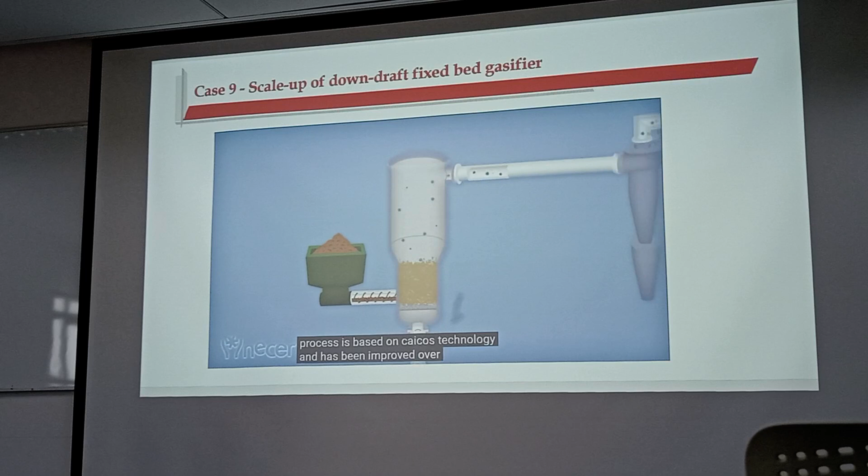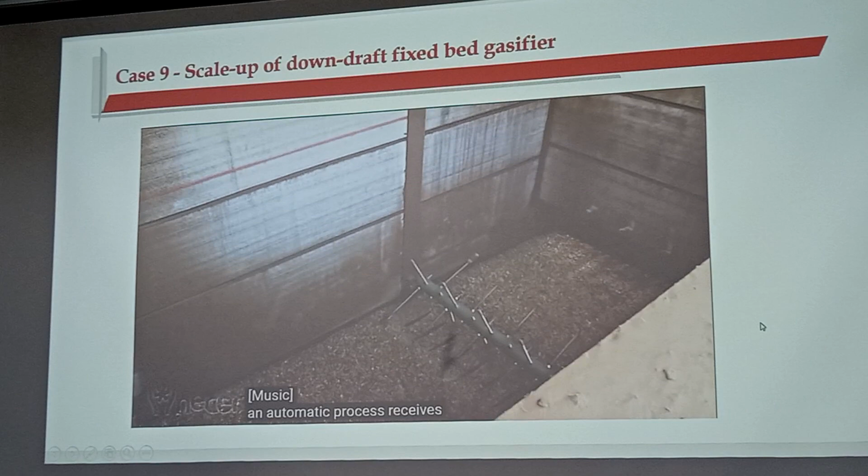The process begins after receiving the biomass and converting it to homogeneous fuel. An automated process receives the biomass and dries it in a patented deep bed drying system. Once prepared in size and moisture, the biomass is transported and fed into the gasification system, which is the heart of the plant.

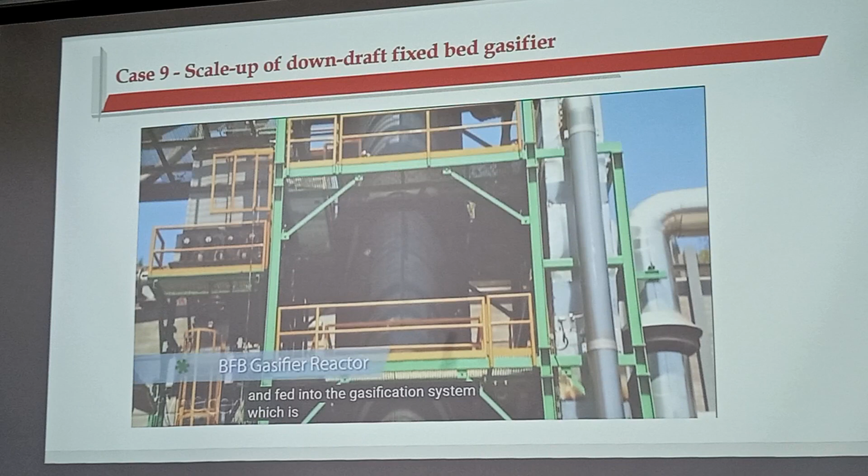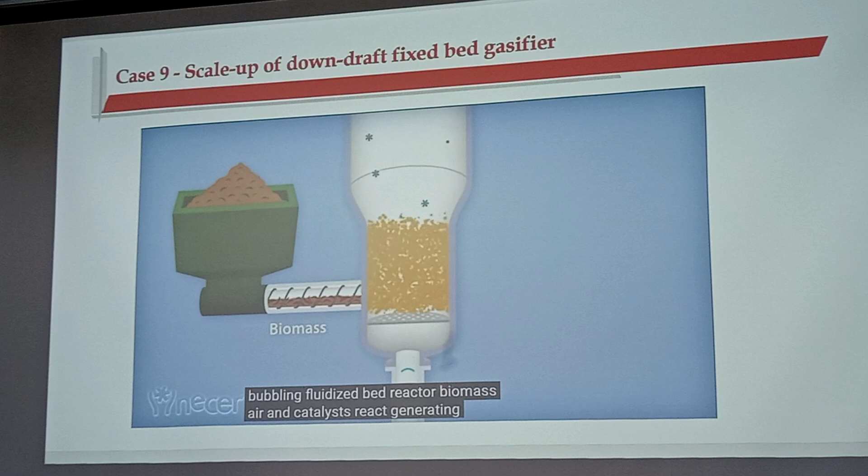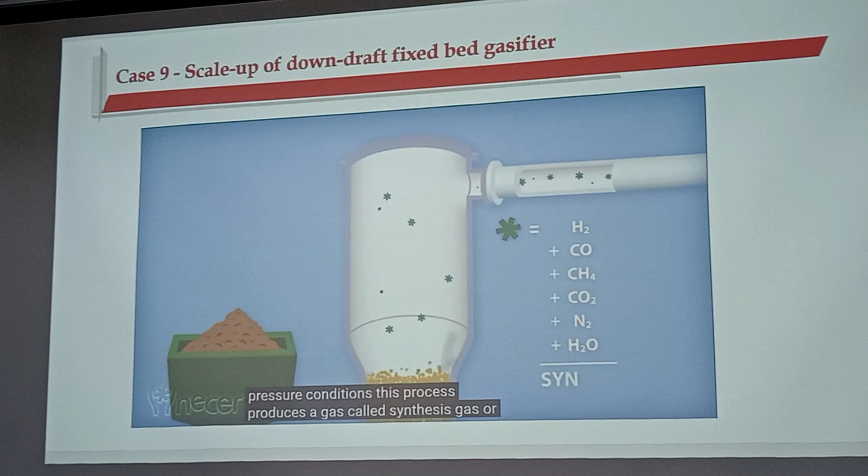In the bubbling fluidized bed reactor, biomass, air and catalysts react, generating more than 40 major thermochemical reactions with a homogenized reducing environment and controlled temperature and pressure conditions. This process produces a gas called synthesis gas, or syngas. The syngas exits the reactor at 800 degrees Celsius and must be conditioned before being used in combustion engines.

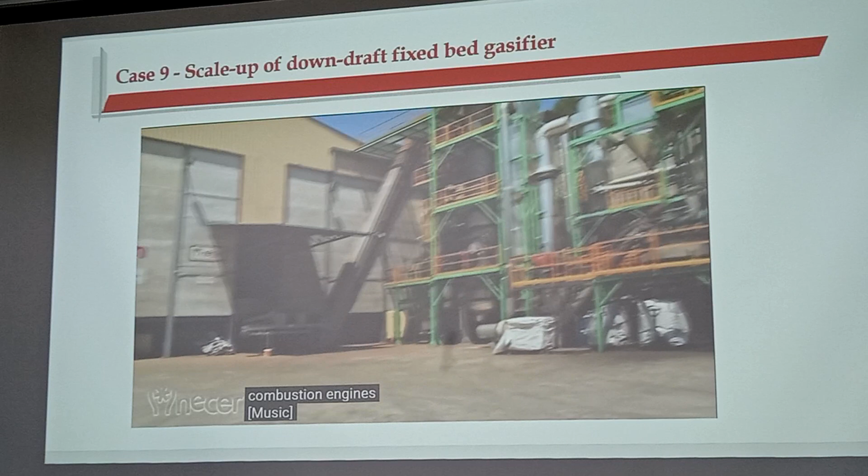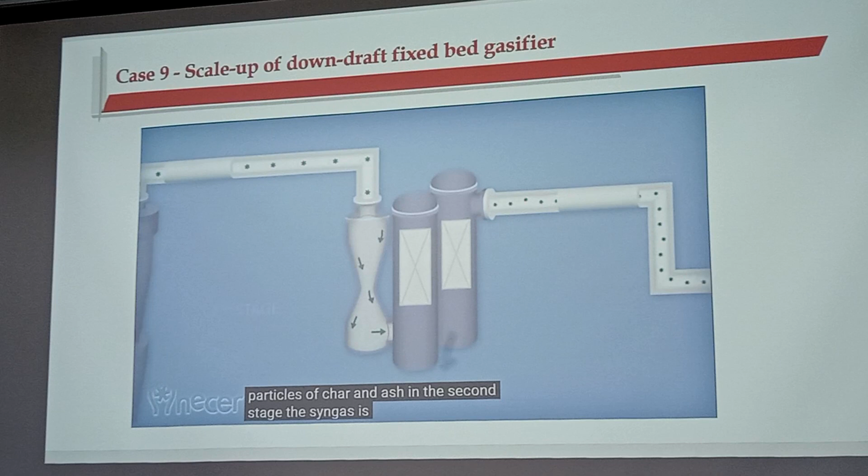The syngas conditioning system consists of two fundamental stages. The first stage consists of high-efficiency cyclones, which separate the solid particles of char and ash. In the second stage, the syngas is subsequently cooled and cleaned, ensuring optimum conditions for energy use in cogeneration systems.

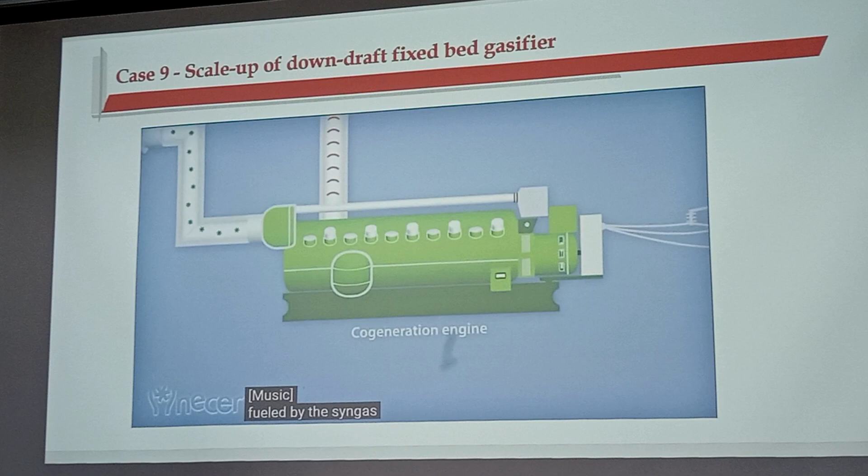Fueled by the syngas, the cogeneration module is a generator that produces energy, which is fed into the grid. Moreover, these internal combustion engines produce useful heat at two temperature levels, thus increasing the added value of available heat.

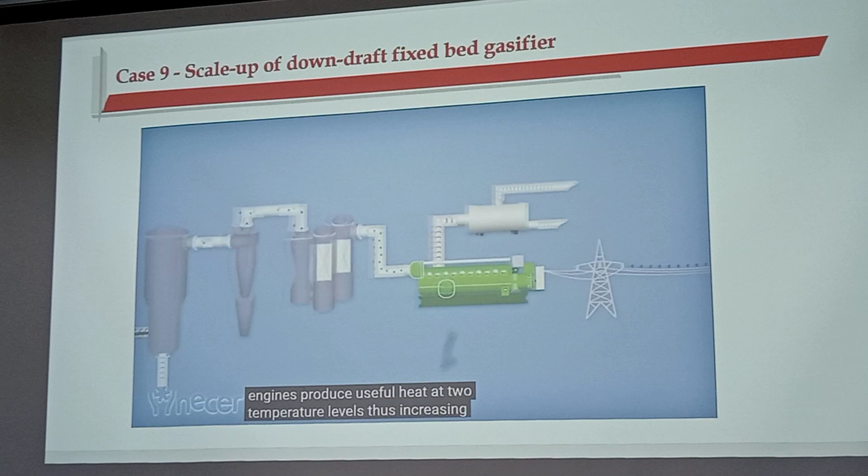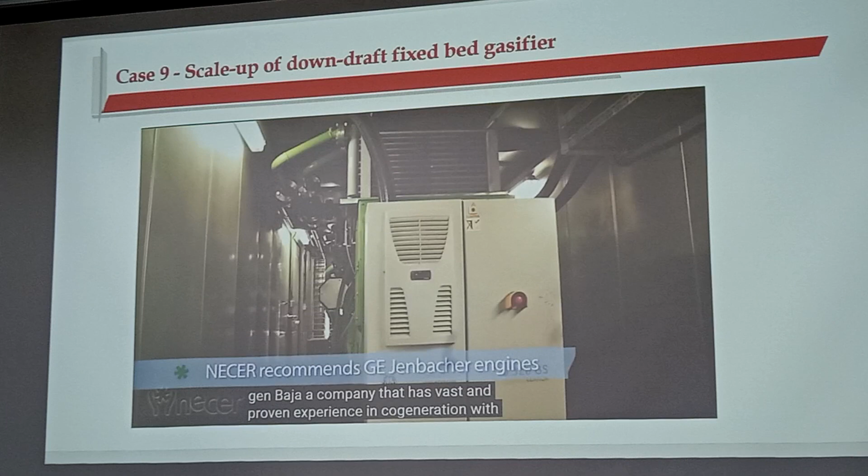The cogeneration modules are developed by GE Jenbacher, a company that has vast and proven experience in cogeneration with special gases such as syngas, with references of more than 40 megawatts in gasification applications.

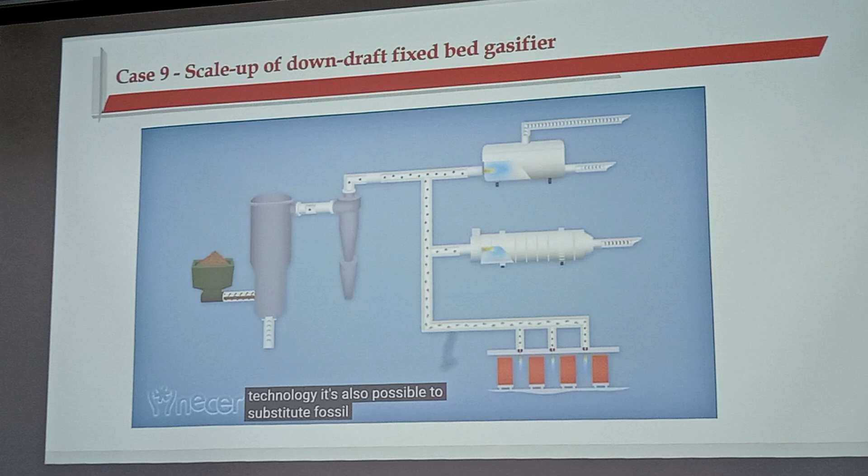With this technology it is also possible to substitute fossil fuels for renewable energy in direct thermal applications. Syngas is burnt directly in thermal units such as gas boilers, dryers and ceramic kilns.

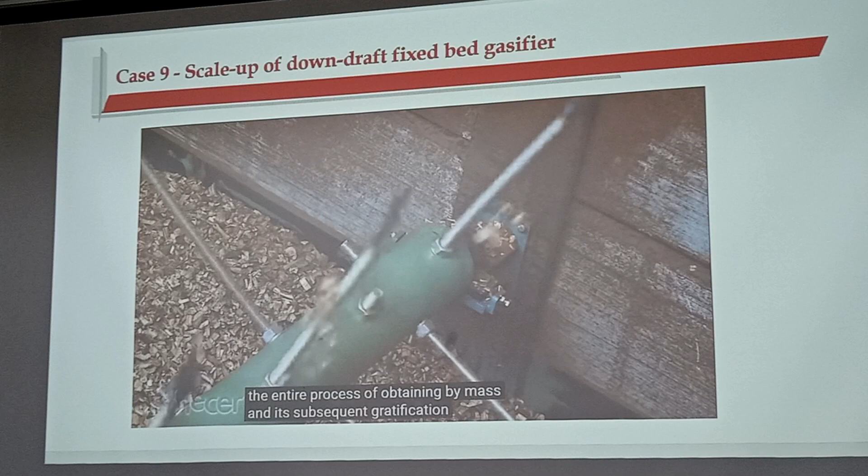The entire process of obtaining biomass and its subsequent gasification has a minimal environmental impact, meeting all the EU's current regulations. It's a clean, ecological and sustainable process.

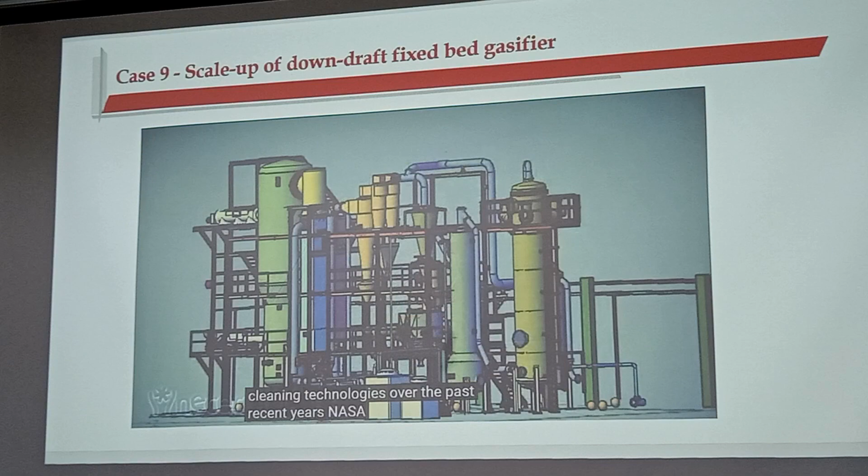Companies have strived to update and improve both the gasification and gas cleaning technologies over the past recent years, specializing in the design, manufacture, installation and commissioning of power plants in the 1 to 6 megawatt range using GE Jenbacher engines.

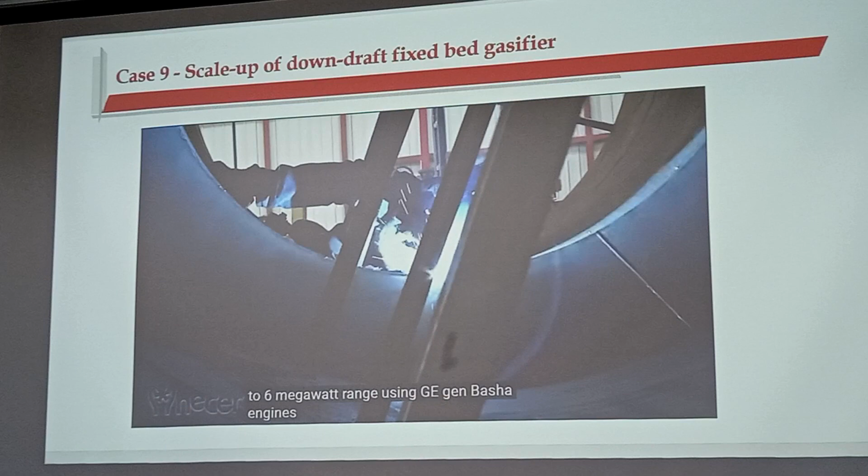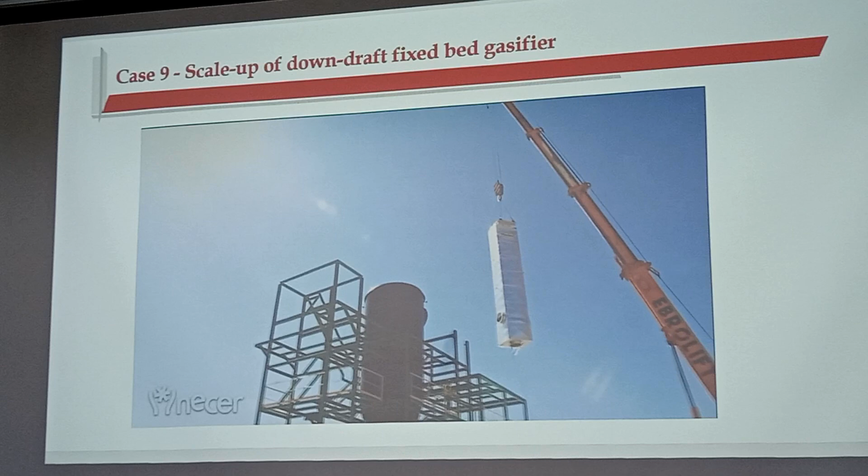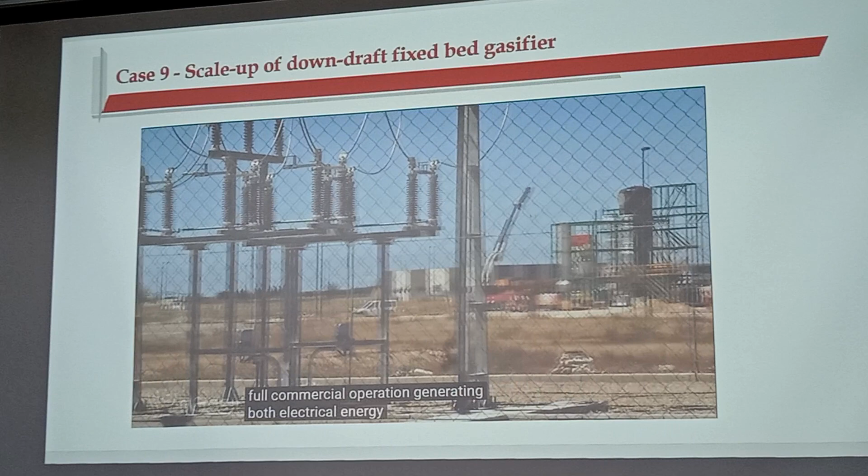This represents the most advanced gasification technology in Europe in full commercial operation, generating both electrical energy and fossil fuel substitution in thermal processes, and thus achieving sustainable green energy production.

This is the end of this video. After watching these two videos, we know the large scale systems.

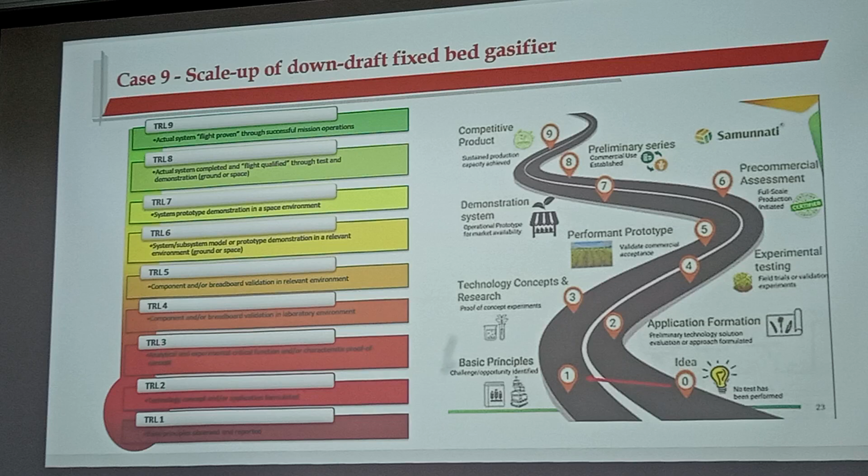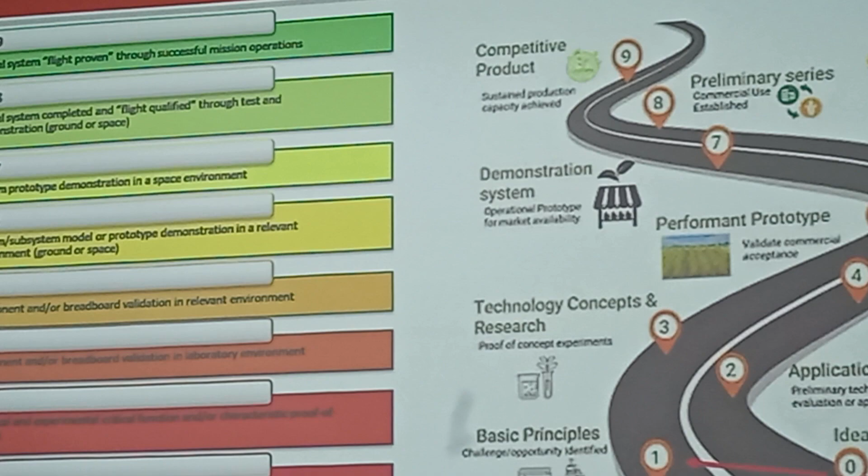You may ask the question, how to develop new technology to create a new system? It's very important. Actually, for the development, for the scale up of different technologies and systems, usually it's not easy. At the beginning, it is an idea. All the new ideas actually are generated from the university and the research institute. Of course, some new ideas are also generated from the research department in some companies. So the first important thing is that before you develop a technology, you should have a new idea.

We also call it innovation. Innovation is one of the most important parts in the development of different technologies. How to understand innovation?

Anybody can give us your understanding on how to understand innovation, from your opinion. What's innovation? Do you have any ideas? Innovation.

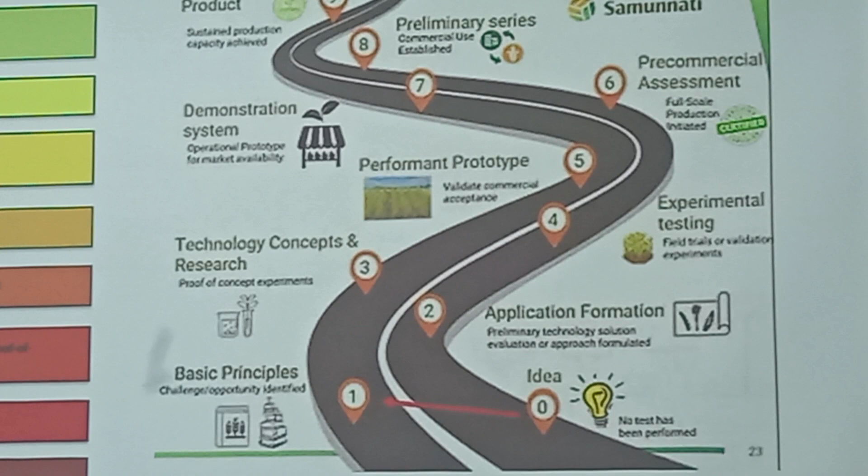What's your opinion? Maybe it's accepting a new idea, or like new materials. Maybe improving the ideas that exist nowadays, improving the ideas of others. Maybe that's also innovation.

Okay, actually your opinion is correct. I also agree with you. Innovation is very important. From this slide, we can see...

Idea is if it is from 0 to 1. Sometimes we call it original innovation. It means that it is a very new thing, different from traditional principles. Nobody has the idea about that. You create it—it is original innovation.

The second student's answer is also correct, because sometimes it's very difficult to develop original innovation from 0 to 1. It's very difficult. But what we can do is improve—we can improve the performance or structure or materials based on existing things. That is secondary innovation. Both of these two innovations are also very important.

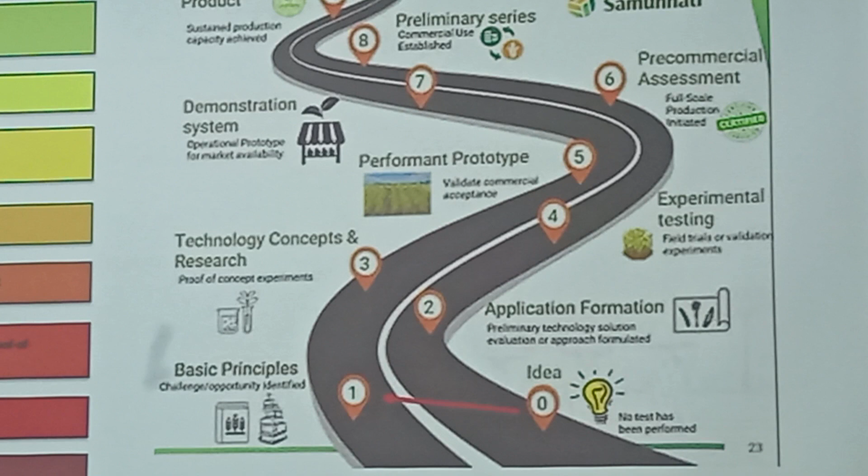For that system, it is at level 4, level 5 and level 6, because that system has been used outside. Sometimes we have used that on our campus. We also use that system on some other farms.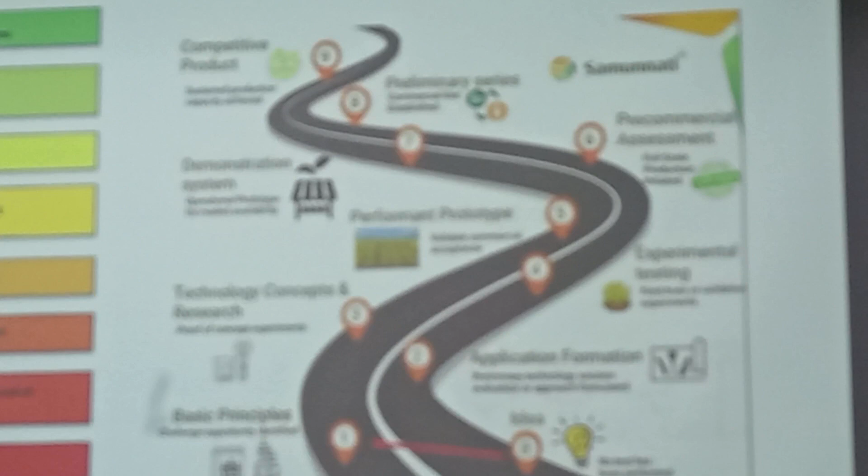It is the use of reactor prototype in relevant environment. After level 6 is level 7. Level 7 is system prototype demonstration in a space environment, meaning we have to use your system in the right places to handle the real waste on site, even though the system is in a small size.

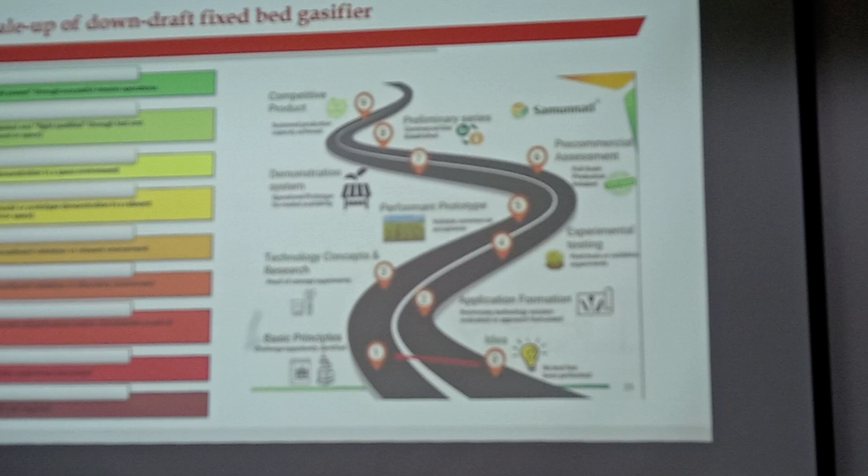Now for level 8, it is actual system completed and flight qualified through test and demonstration. In this part, we should have a full set of your systems, and you also need to use the real waste to do the test. If this process is working well, your system can reach level 8.

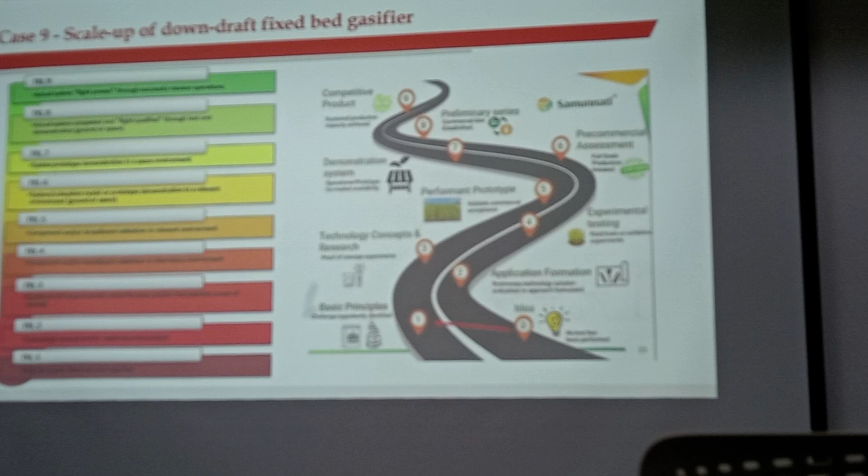But for our university and research institute, generally we can get to level 6 or level 7, because if you want to jump to level 8, you need enough money to develop your system. Sometimes we don't have that.

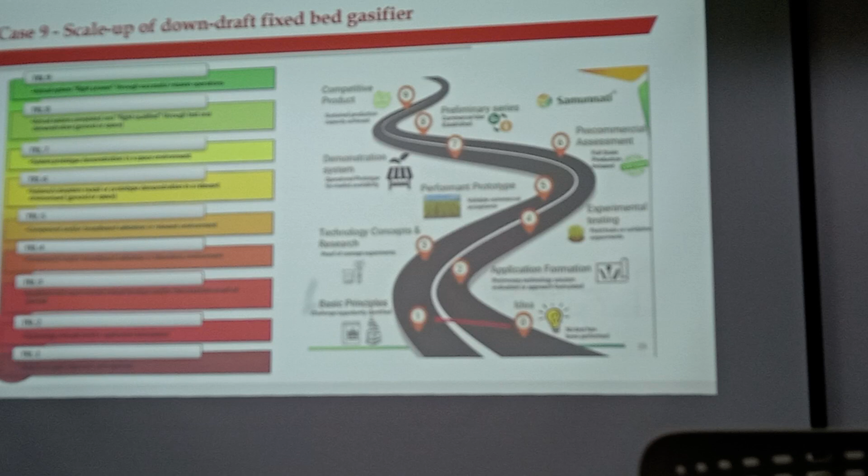That's why usually we will collaborate with some other companies. We will focus on the technology part, and the company will focus on the use of this technology in the market.

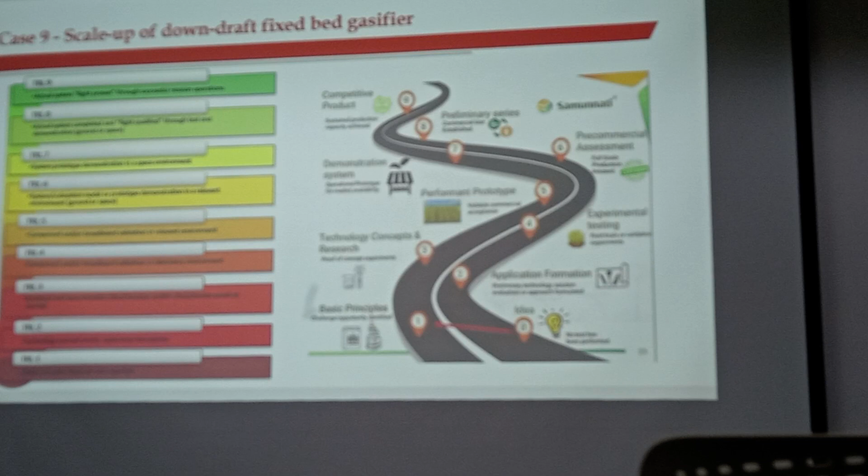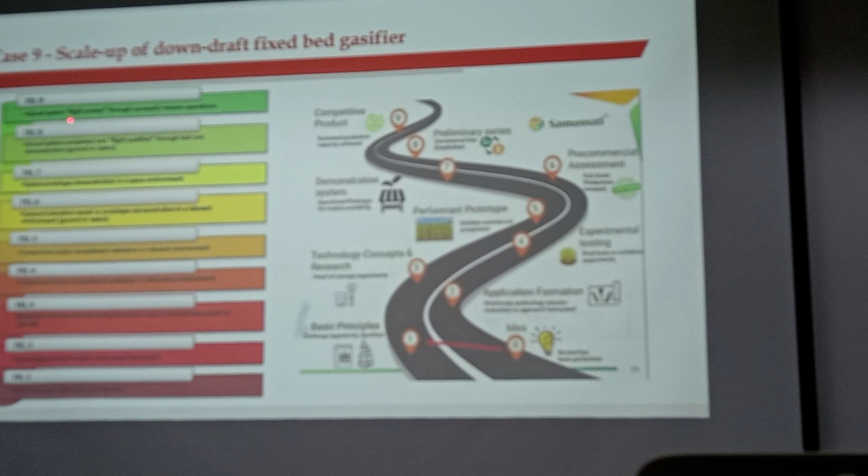That is level 8. The highest level is level 9. Level 9 is an actual system flight proven through successful mission operations. If your system can reach this level, it means you can use that in the market.

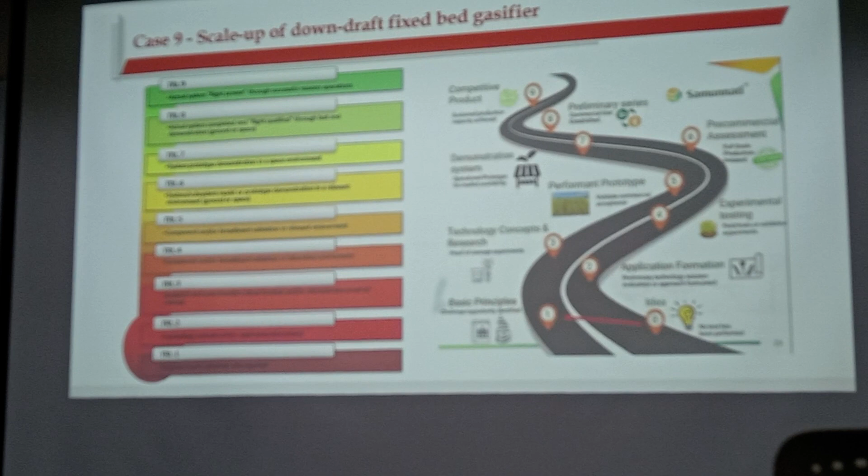But before we use the technology in the market, sometimes we need to solve a lot of issues. In the lab, we can solve the issues of technology, but for the pilot scale systems, we should solve some engineering issues.

Once the system reaches level 9, we should solve all the issues, including engineering issues and also safety issues. For example, the gasification process is a thermal conversion process. When we do the test in the lab, it is fine.

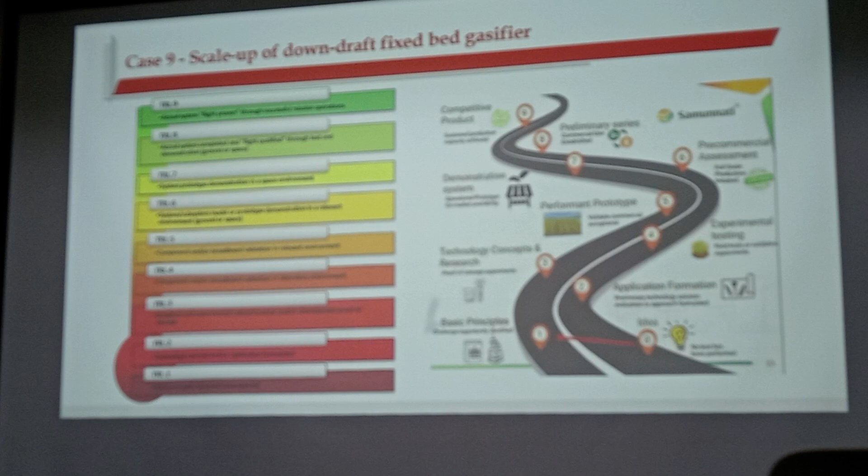When we use a small scale system, it is fine, don't have a lot of safety issues. But if you use large scale, safety issues are also very important. On the other hand, cost is also very important. If your system is very expensive, it means it's hard to find the market. So if you can solve all these issues, you can use your technology in the market.

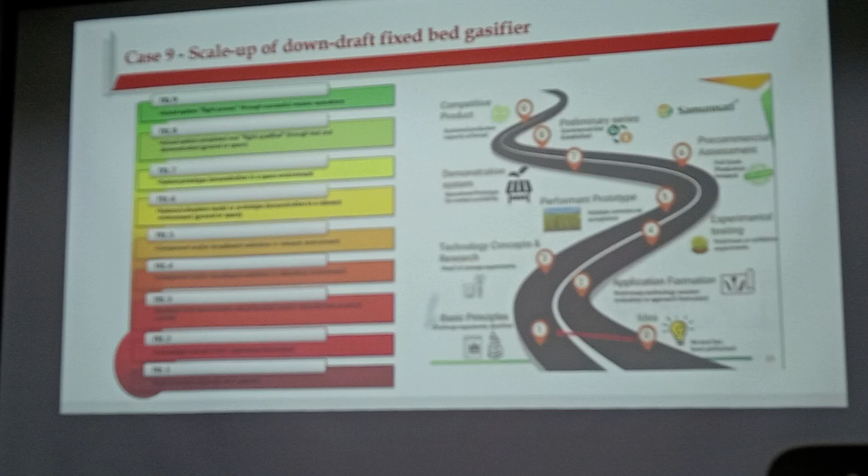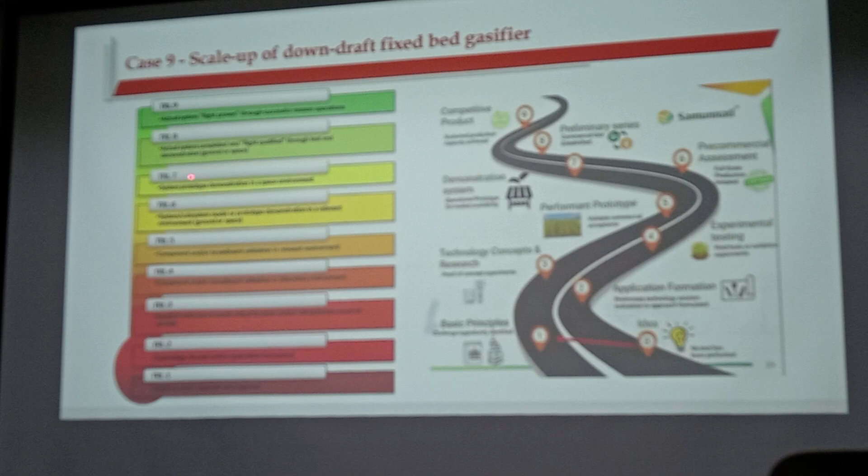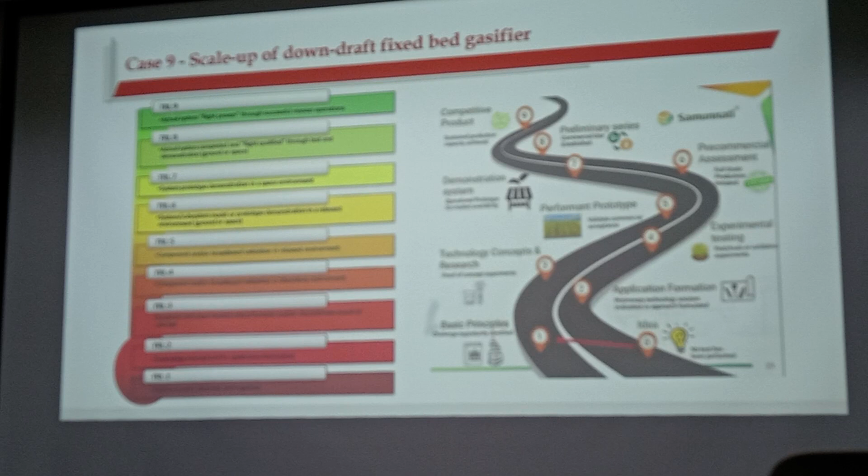This is the scale up of all different types of technologies in practice. You can see it is not easy. But one of the most important parts is from level 1 to level 7 - all these parts are finished in the research institute and university, so you can contribute a lot for these levels.

Part 3 is the biomass pyrolysis process. Biomass pyrolysis.